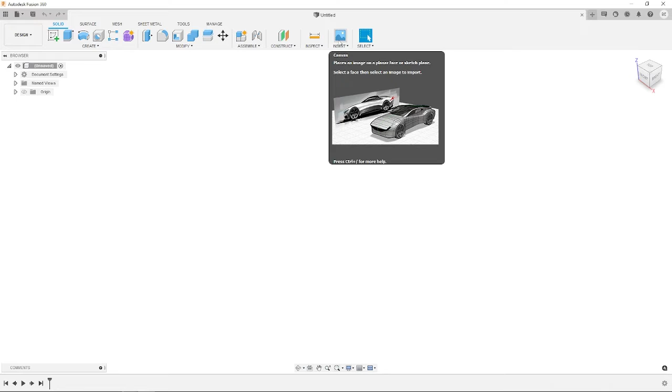I'm going to go ahead and start with just a blank, untitled document. And from there, I'm going to go ahead and click this insert button. You're going to need to have a picture of your diamond sword as a reference. You're going to want to go ahead and download an image from the internet. This will just kind of help you keep the proportions right, and it helps keep the design a bit more cohesive and to scale.

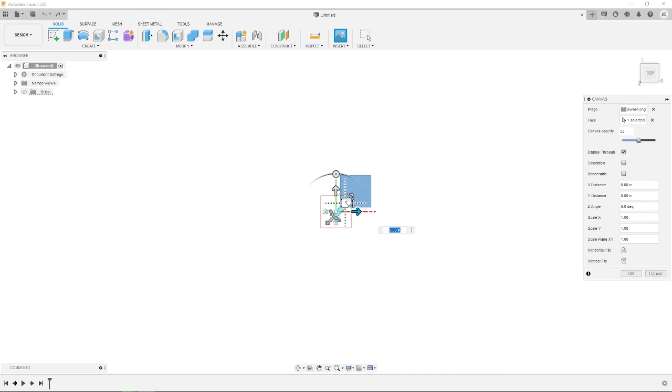So again, we're going to go ahead and click the insert button. We will insert from my computer. I have my diamond sword here. I'm going to go ahead and double click it to open it. I'll click on the top view, which is this one. And we can scale it up and down, or however big we want it to be. I'm just going to leave it as it is right now.

So now we've got our diamond sword in here, the image for reference. And I'm going to go ahead and click Create Sketch. I'm going to click again on that top plane. And from here, I can go ahead and start 3D modeling the sword.

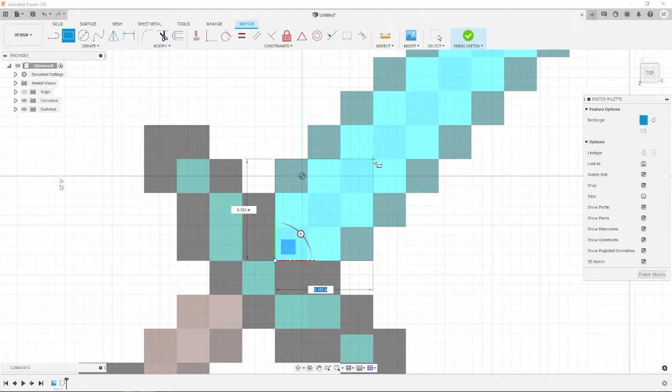So we can go ahead and come down here. This is going to be just a lot of squares and rectangles. That's kind of what Minecraft is comprised of, which is what makes this project so easy to do. It's just going to be a lot of modeling squares. You're going to want to make sure that you have all your edges kind of lined up, and you can always click and drag and rearrange and move these. I'm going to go ahead and do that really quick. If you'd like to follow along, you're more than welcome to. But we're really just going to go ahead and sketch along the outside of the image for our sword.

So now you can see that we have the body of our sword here. You can see all of our little profiles and things. I'm going to go ahead and extrude this now so that I can see kind of where we stand and what else we need to do.

So I'm going to go ahead and go extrude, and I'm going to go through and select all of these little squares we just made. You can see that we may have some little areas here where it's not going to extrude properly, so just go ahead and zoom in, or you can fix your sketch profile. I'm kind of lazy, I'm just going to zoom in and select the little pieces that I missed in here. It's not really going to change anything one way or the other, because it's all going to be solid anyways.

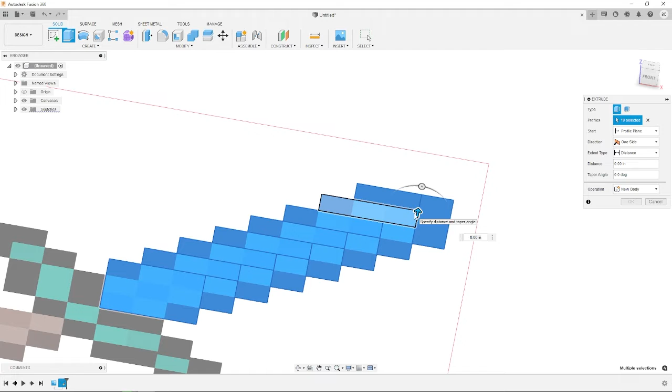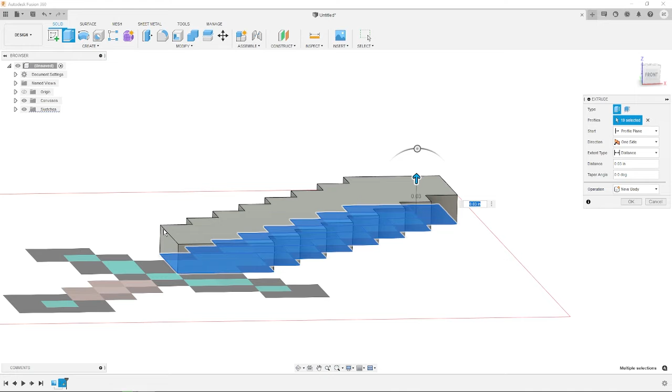I'm going to go ahead and make this one... this is 0.03 inches, so this model is going to be really, really small. This is where that kind of scaling for the image would come in handy, but I didn't do that. So this can be scaled up in your slicer software, and I'll show you how to do that once we get this exported. So for right now, I'm just going to make it look pretty proportional to what I want it to look like.

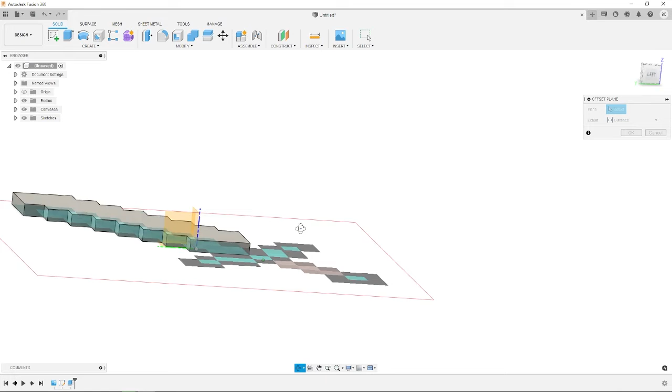So now we've got the blade, and we need to go ahead and model the hilt next. But because we want this to be that blue diamond color, and we want the handle to be more like a brown color, we're going to go ahead and create a tab down here so that this can go into the handle of the sword when we're done.

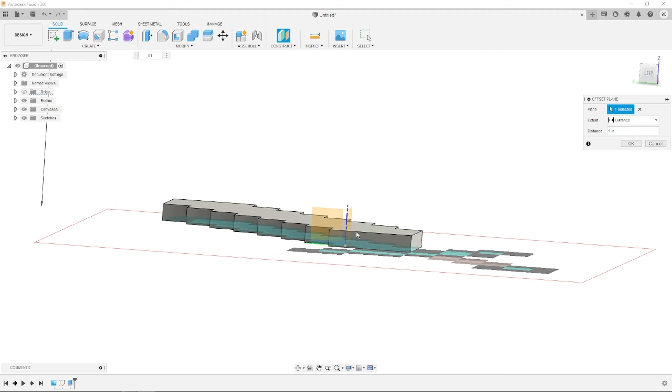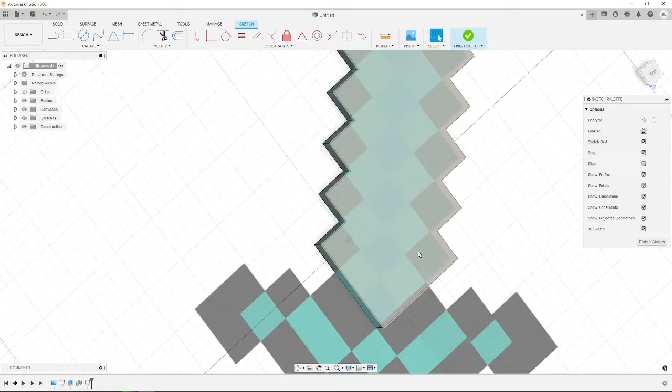I'm going to go ahead and click create, and we're going to have to select our little plane, and then I'm just going to put a little tab here in the middle. I'm going to kind of find this corner piece, line it up a little bit, and go down just like that. You can see that that's in the middle.

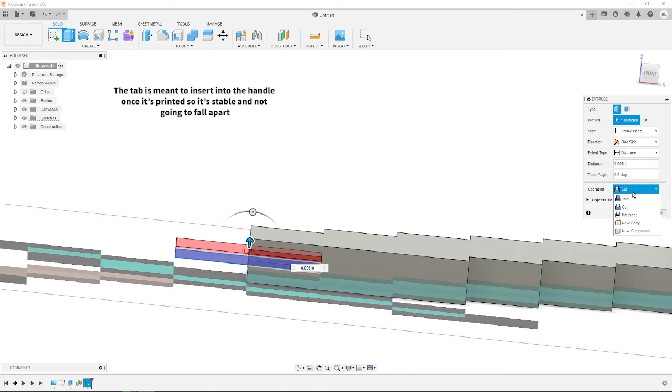I'm going to go ahead and extrude this. I'm going to make it 0.005. If it turns red like this, make sure that you go ahead and do the join button instead of the cut operation. We're going to go ahead and make this symmetric.

And now we have a little tab so that when we go to assemble our sword, it's going to sit in there really nicely, right?

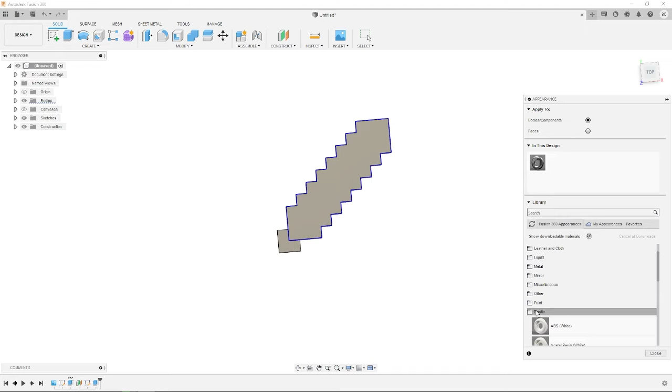So I can go ahead and we will just hide the canvas. We can right click on this, set the appearance. This is a little bit more just cosmetics, this won't print like this. It'll print whatever color your filament is that's loaded into your printer. But we can go ahead and we'll just drop white on there, right click, edit. Pretty okay, right? Yeah.

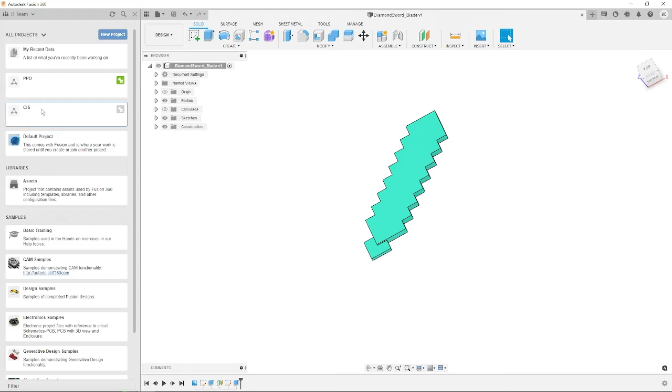So we'll go ahead and save this and we'll call it Diamond Sword Blade, right? And let's just go ahead and we'll drop it into a new folder. I'll go save it. So now we'll be able to go into our folder, and instead of creating a new document, we can actually just copy right from there to maintain the scaling on here.

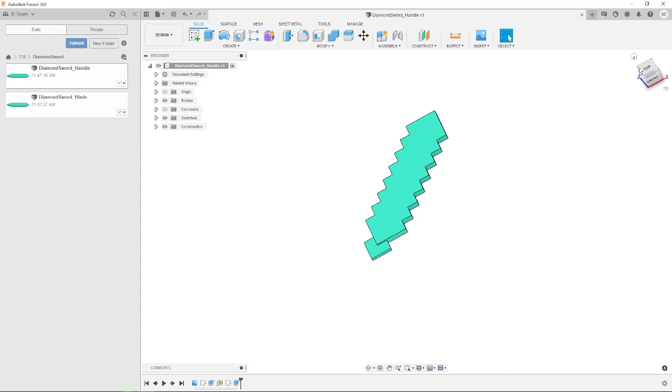And we'll just go ahead and rename one of these to handle. And you see that that renamed the one up here. So now we can unhide our canvas, we can hide this body, and we can toggle this as we need to.

We're going to go ahead and click Create Sketch. We will sketch on the top. And this is really the lazy way to do it, and I know it's the lazy way to do it, but work smarter, not harder, I guess. These are obviously not probably best practices for things, but I found that this definitely keeps everything fitting nice and neatly together.

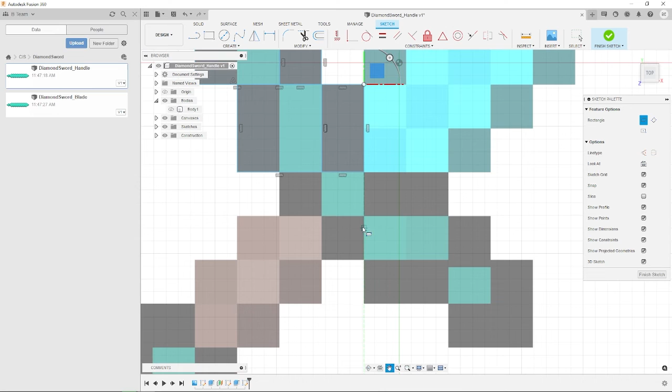We're going to go ahead and create another sketch. We'll drag it out, go to the middle point here, and we'll just keep doing some of these, and just continue. I'm just going to continue to model this handle and follow this sketch. So I'll go ahead and do that now. Feel free to follow along.

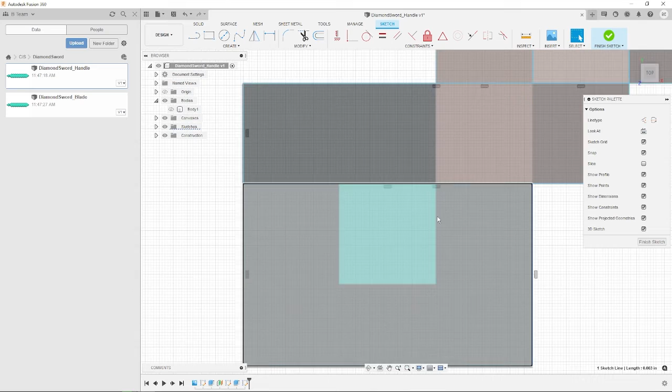So obviously, as I'm modeling, I can see that there's going to be some little gaps and things in here, and there's going to be some weird sizing and shaping, and we can go back through and we can drag them kind of back out to where we need them to be, and just sort of generally clean it up a little bit.

And we'll end up with a relatively good-looking sword hilt, right? We'll just kind of tweak it there, make it look really nice and clean.

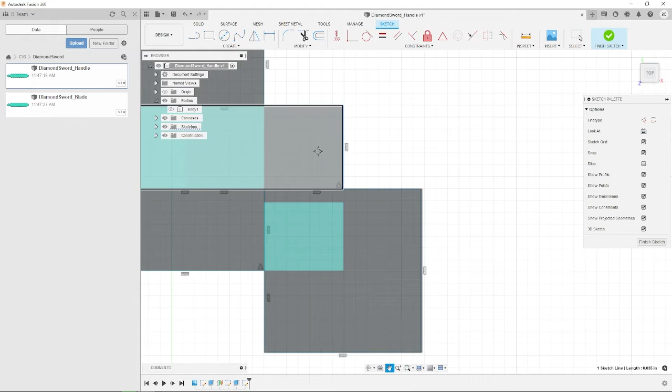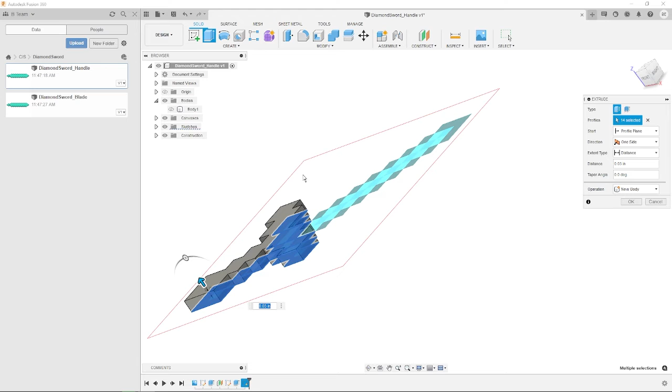Yeah, just like that. So we also know that the blade is going to sit here, and we're going to go ahead and extrude this handle first. So we know that our blade is going to be thinner than the handle, right, so the handle's going to have some overhang on either side, and we'll kind of accommodate for that a little bit. So for this one, I'm going to make it 4 instead of the 2 that we made, so it's twice as thick.

I can go ahead and unhide this sketch. So you can see that this is in here, and we're going to make this kind of a thicker point for our blade to sit in. We'll go ahead and extrude it. So you know that we made this one.

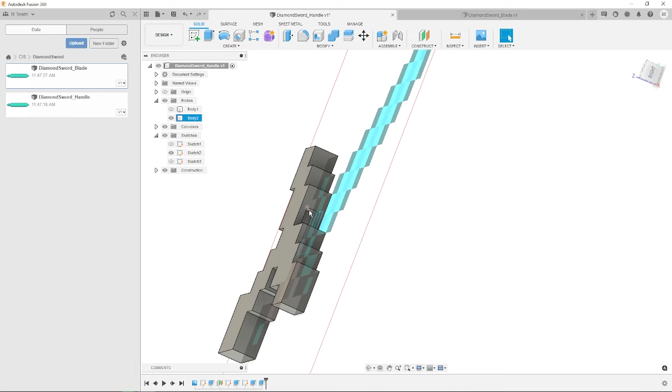Made this one 1, so we're going to make this one 2, because obviously 3D printers aren't perfect. They're going to have a little bit of wiggle room. Or we could even make it a tighter tolerance if we wanted to, but for this, I'm just going to go ahead and make it the 1.

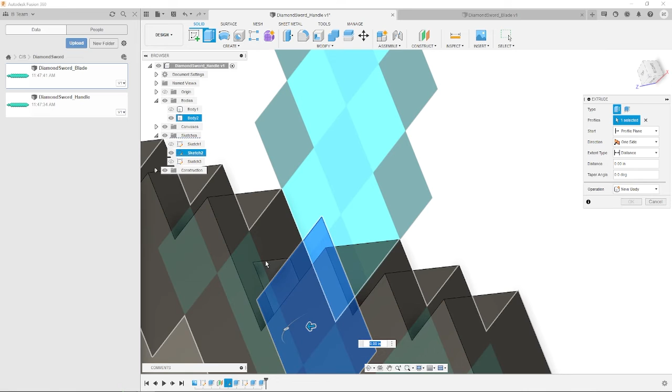The one thing we have to make sure of is the ability to actually get the blade in there. So we're going to come back in and grab these profiles, and take them out so that the actual shape we're trying to put in will fit, and we won't have that limiting factor of that lip there. That makes sense.

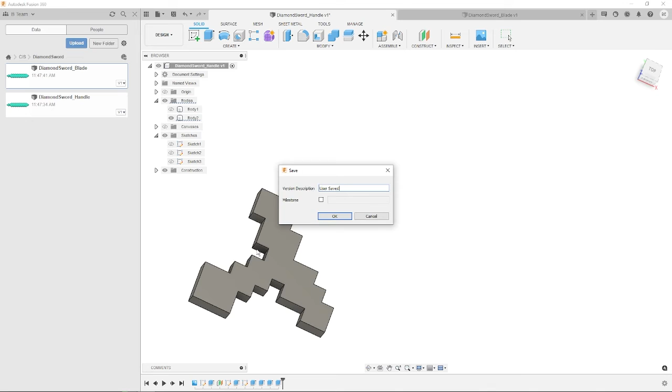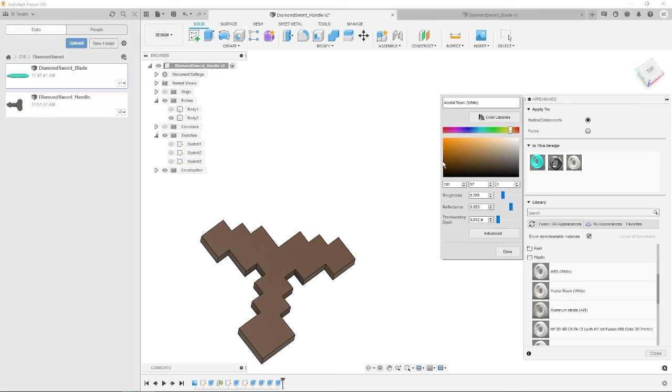Now we have this handle, right? So we can hide our canvas and save our changes so we don't wreck anything. We can right-click on it and go to Appearance, then drop another color in there. We can right-click on this color, click Edit, and drag it right down to brown if we wanted to.

Now we've got a brown handle for our blue blade. If we want to see them together, we can drag this assembly right in here, and it'll pop in, and we can move it around a little bit and get it to where it needs to go to fit into our sword. There you have it—now you have a Minecraft sword.

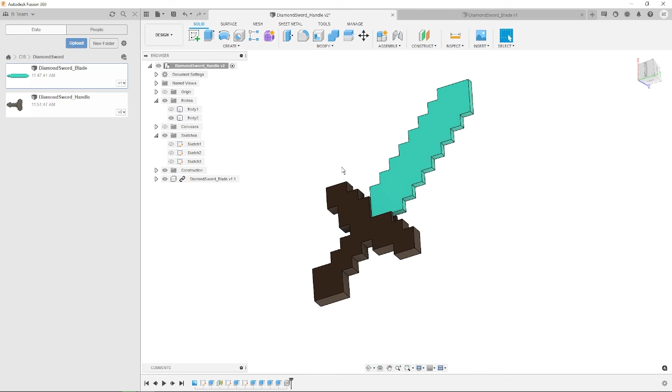It's going to print in 2 pieces, and I'll show you how to export those to where they're going. We're going to do an STL file format—that's the one we need for our 3D printers. Make sure you drop it into the folder you want it to go into, and click Export.

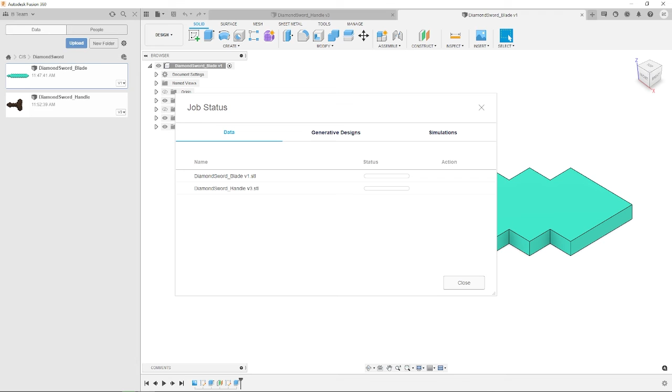These will take a couple minutes to export fully, and once that's done, you can open the file location and open it up in your slicer, and you'll be able to see, scale, and go from there. I'll show you that right now.

But yeah, this is now able to be 3D printed in the blue and brown, or whatever color sword you want—if you want a diamond sword or an iron sword. I hope this video was helpful for you guys.